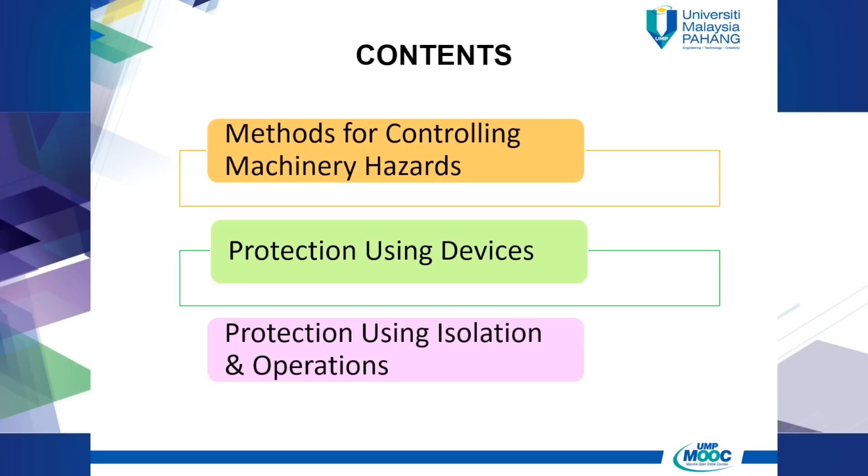In this part of the machinery safety lesson, we will focus on a few things, namely methods for controlling machinery hazards, protection using devices, protection using isolations and operations. At the end of this lesson, we hope you will achieve these two objectives.

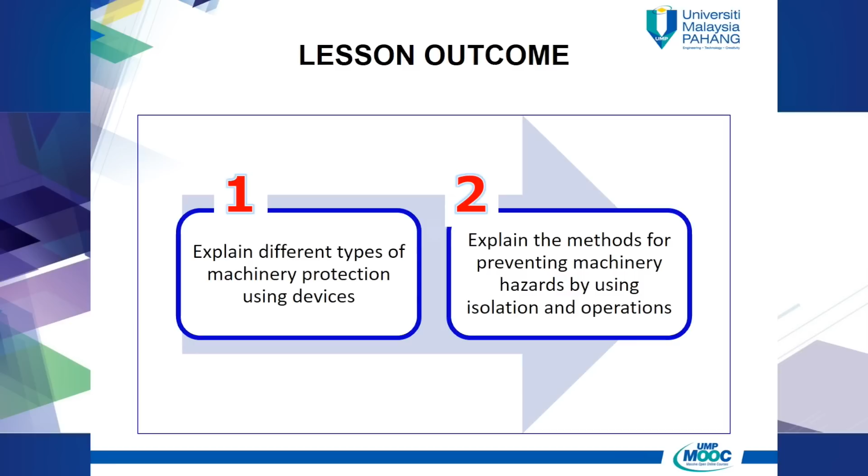Objective number 1, explain different types of machinery protection using devices. And objective number 2, explain the methods for preventing machinery hazards by using isolations and operations. In the previous lesson, we have learned about machinery protection using guards. In this lesson, we will learn the other types of machinery protection, namely using devices, isolations and operations.

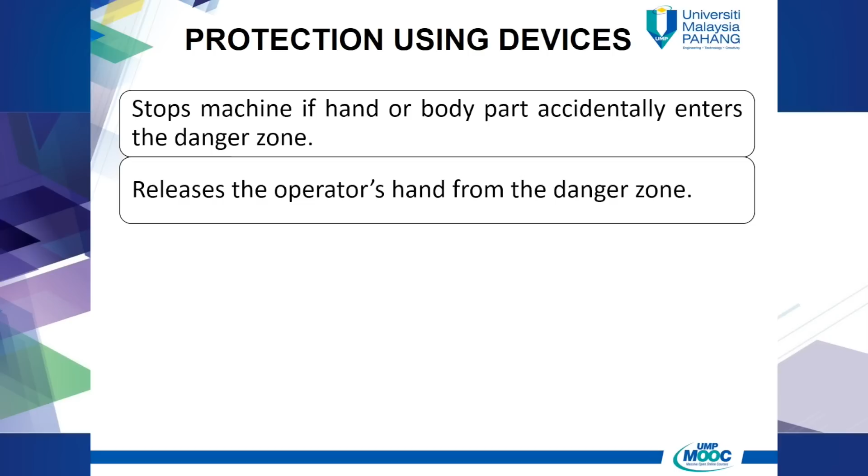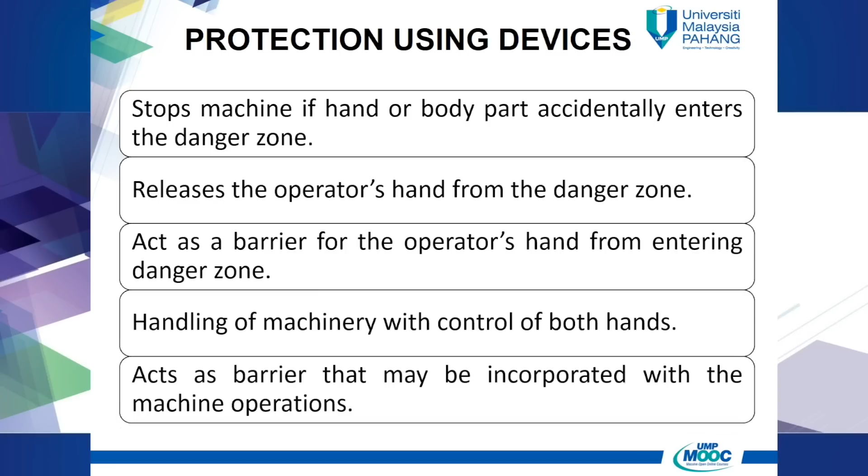Devices are used to stop the machine if a hand or body part accidentally enters the danger zone, release the operator's hand from the danger zone, act as a barrier for the operator's hand from entering the danger zone, handle machinery with control of both hands, and act as a barrier that may be incorporated with the machine operations. There are 4 types of devices used for protection against machinery hazards.

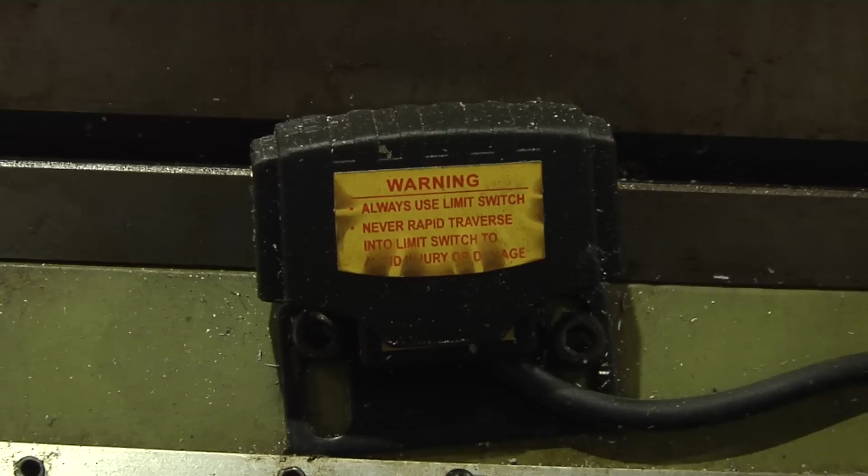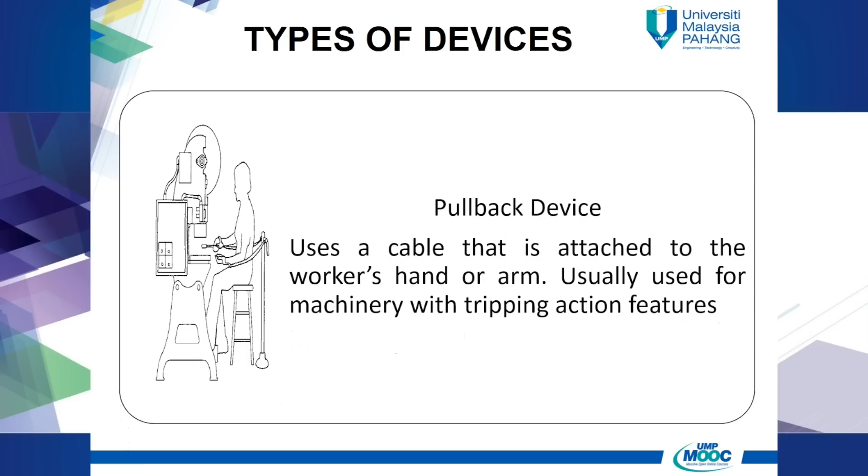Number 1, presence sensing device. This device will stop the machine or disrupt the work cycle or operations if a worker is in the danger zone. Number 2, pullback device that uses a cable that is attached to the worker's hand or arm. It is usually used for machinery with tripping action features.

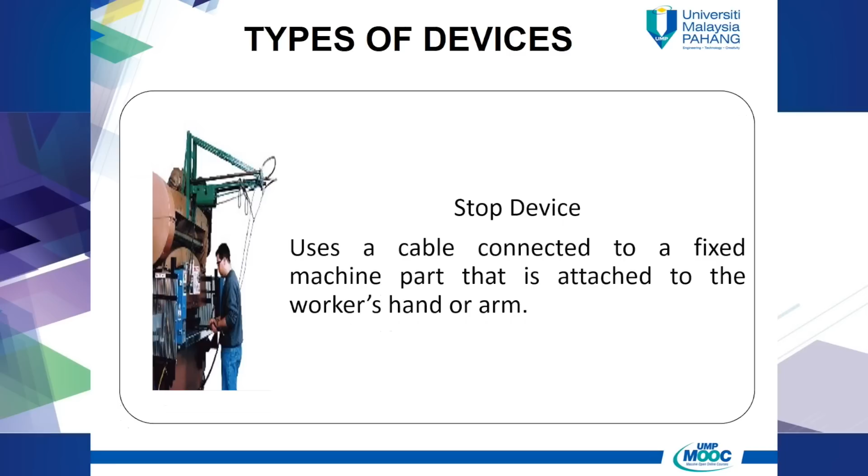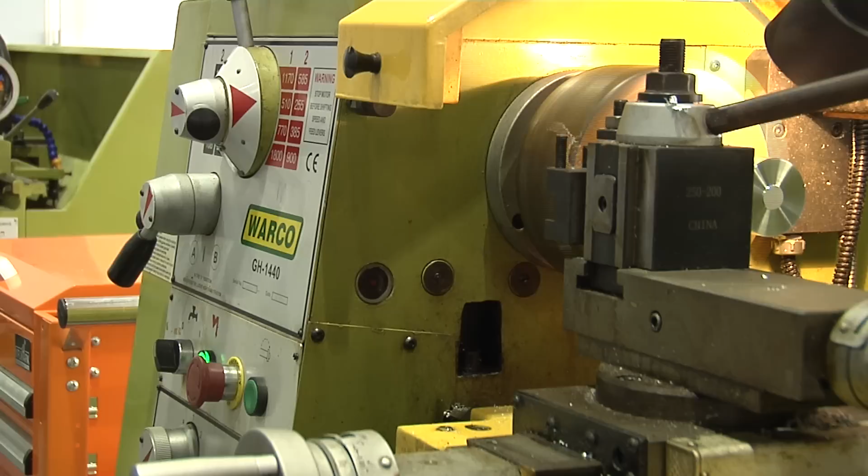Number 3, stop device that uses a cable connected to a fixed machine part that is attached to the worker's hand or arm. Number 4, safety control device. This device is manually activated and needs to be manually reset to start the machine.

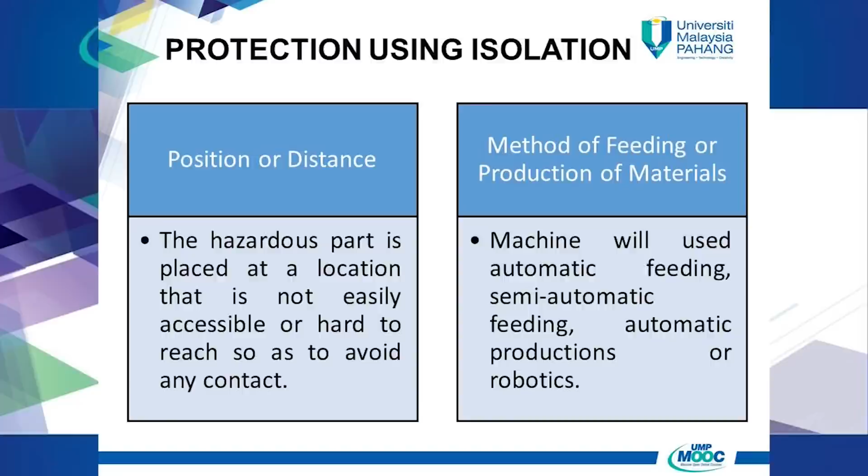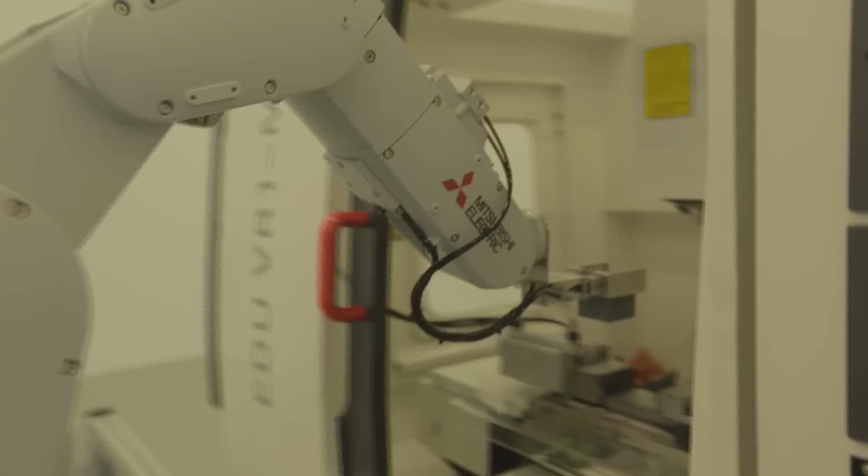For protection using the isolation method, it is based on position or distance and method of feeding or production of materials. For position or distance, the hazardous part is placed at a location that is not easily accessible or hard to reach so as to avoid any contact. For method of feeding or production of materials, the machine will use automatic feeding, semi-automatic feeding, automatic production, or robotics.

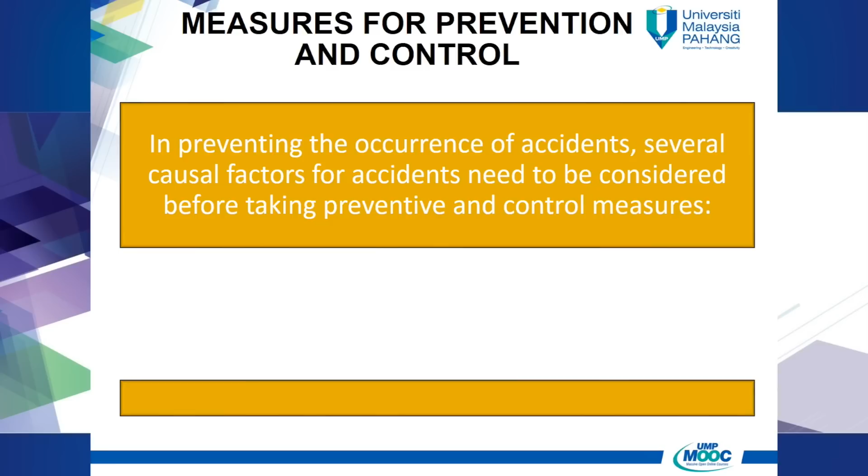In preventing the occurrence of accidents, several causal factors for accidents need to be considered before taking preventive and control measures. Number 1, human factors. Number 2, machinery factors. Number 3, factors of environment or surrounding areas.

To conclude this lesson, let us recap the important points. Machinery hazards can be prevented and controlled by using guards, devices, isolations, and methods of operation. Several factors need to be considered before choosing the right method of prevention.